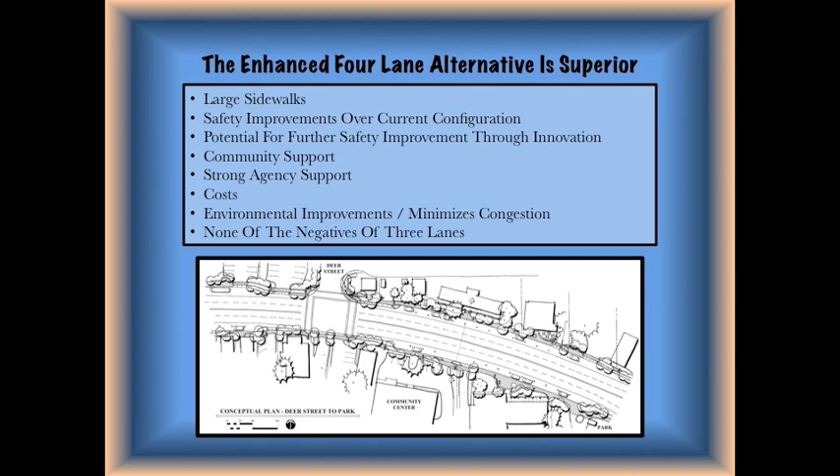The enhanced 4-lane option would be a great improvement over what currently exists, and has received strong citizen and agency support. The 4 lanes will not have a slew of issues that are associated with the implementation of the 3-lane road. In 1999, Caltrans conducted a public outreach that was attended by 44 people. At the end of this meeting, only 4 people supported the 3-lane option.

Yet strong political influences have continued to push for the 3 lanes for the previous 10 years, and despite evidence against such a plan, may yet see the highway's capacity severely reduced. This would be contrary to the community and visitor desires measured in several polls.

The North Lake Tahoe Resort Association conducted several polls that show the #1 issue both residents and visitors have with Lake Tahoe is traffic congestion. And yet, Placer County is trying to spend $50 million creating this congestion.

The Kings Beach Business and Citizens Alliance ran a series of 6 advertisements in the local papers. With each ad, there was an increase of support from local citizens and businesses for the 4-lane option.

Here is the cost estimate of the 2 projects from almost 2 years ago. The current price tag is $50 million.

So, let's talk about how great this 4-lane option is. One of the first things to point out is that the lanes are being reduced from 12 feet to 11 feet. The purpose of this is to narrow the vehicular lanes and slow traffic. This is a commonly used traffic calming technique and has shown great results in reducing vehicular speeds.

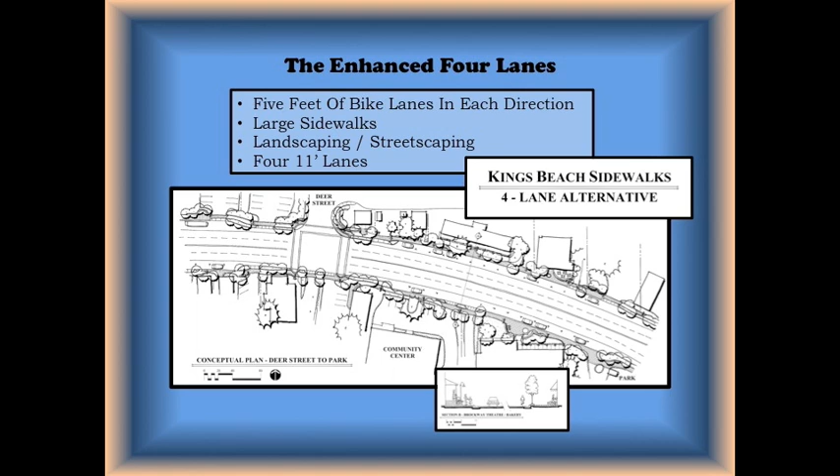An engineer was hired to analyze sidewalk widths within the commercial corridor and concluded that the average sidewalk width on the north side of the highway would be 8.9 feet and 7.8 feet on the south side after implementation of the enhanced 4-lane option. With the purchase of right-of-way easements, the sidewalks will ultimately be larger than this, though.

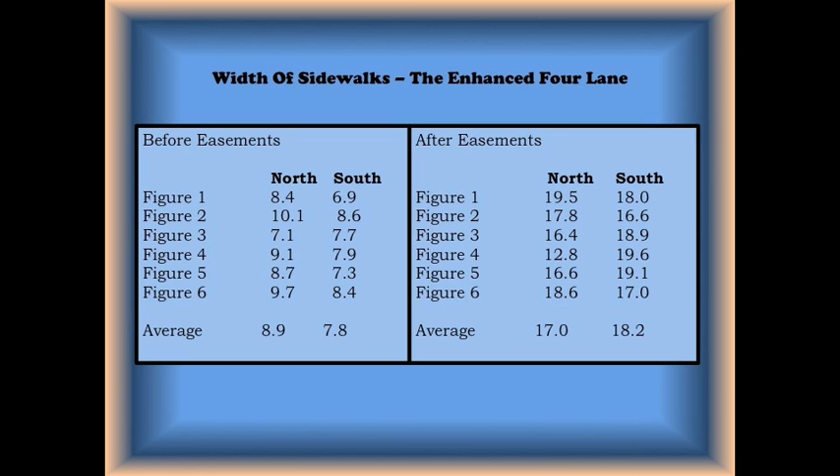Let me explain. Here is an example of a right-of-way easement. The line seen here marks the property line for the public right-of-way in Kings Beach. But throughout Kings Beach's commercial corridor, the sidewalk extends beyond this property line and onto private property. Placer County purchased right-of-way easements to encourage businesses and property owners to help create larger sidewalks than would otherwise be available.

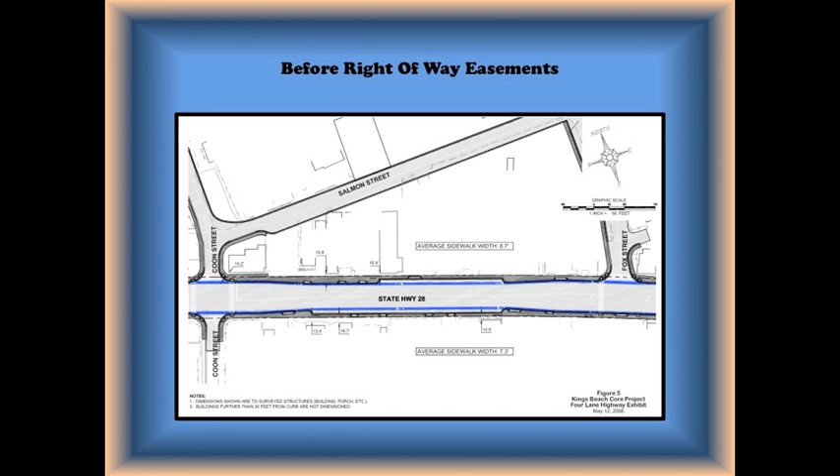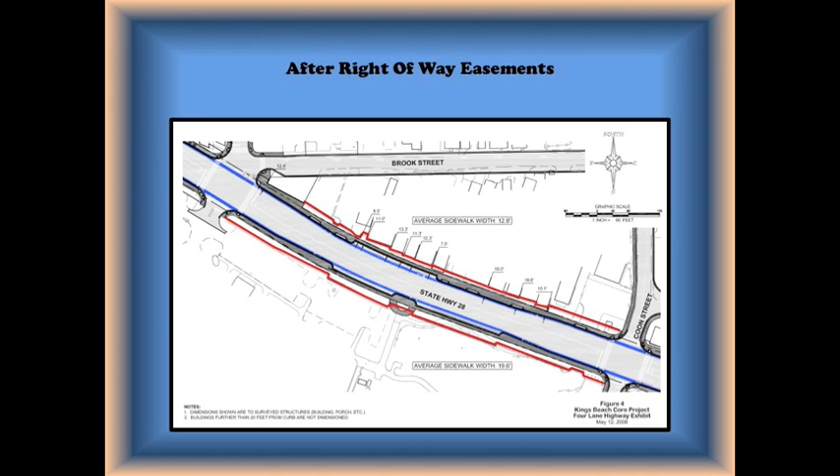Seen here is the engineering conducted to calculate sidewalk widths. Before right-of-way easements, the sidewalk on the north side has an average of 8.7 feet. After easements, the sidewalk could have an average of as much as 16.6 feet. This technique of review was used throughout the commercial corridor to calculate these numbers.

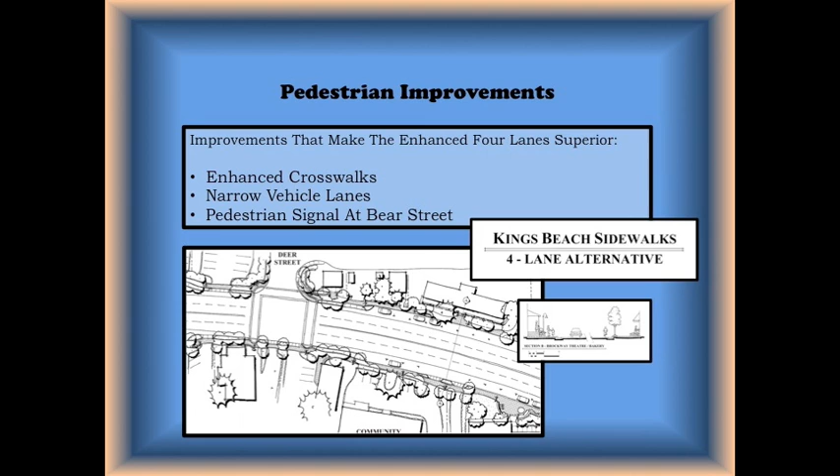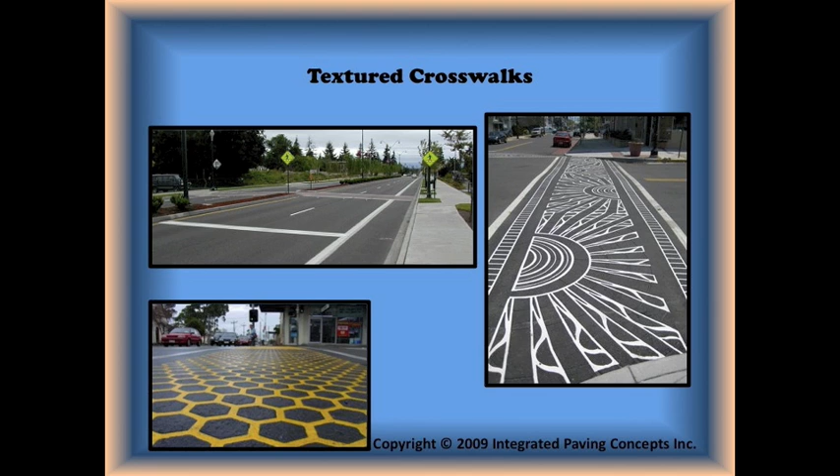The 4-lane road includes several pedestrian improvements in addition to large sidewalks, including enhanced crosswalks and pedestrian lights. Textured concrete is used to make crosswalks more visible. Drivers tend to drive slower in areas with highly visible crosswalks, as these crosswalks signify to the driver that they are in a pedestrian corridor. Here are a couple more examples.

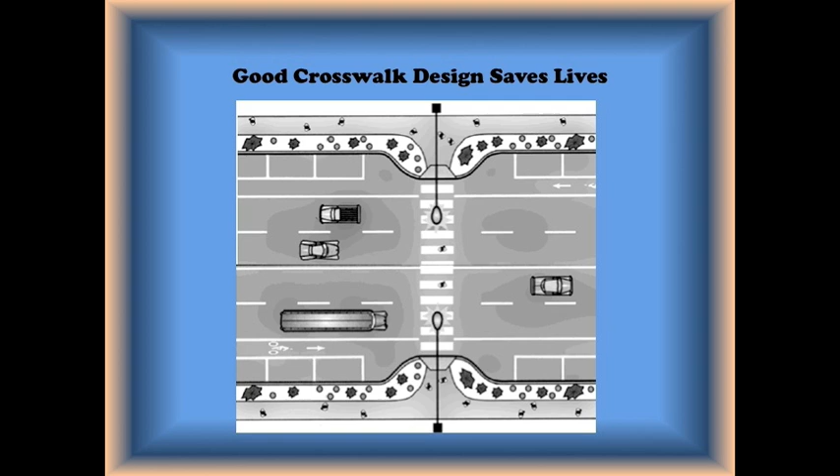Bulb outs are another excellent tool used to slow traffic and work well when they are located at crosswalks. The installation of a pedestrian crossing signal at Bear will help to facilitate the heavy crossing that occurs in the summer when pedestrians are using the State Park Beach and shopping in our downtown district.

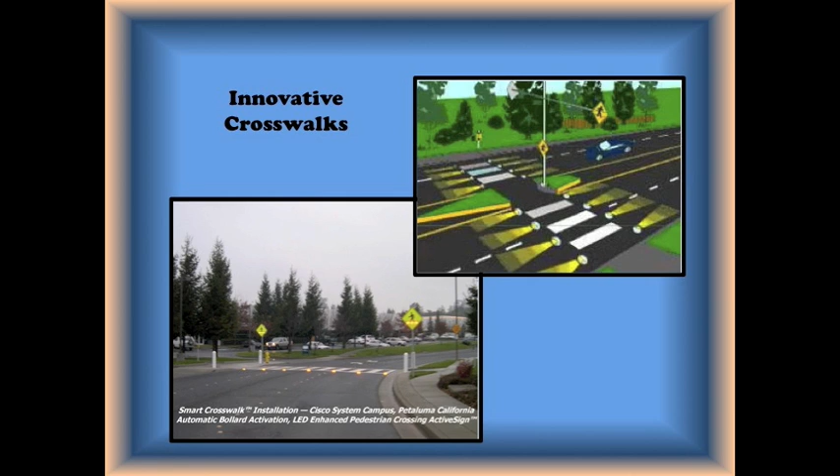Currently, we have poorly marked crosswalks. Proper signage is the first part in enhancing these crosswalks. Enhanced crosswalks can also and should include embedded lighting to make drivers more aware when pedestrians are in the crosswalk. These lights are used in snow country and work wonders for a roadway.

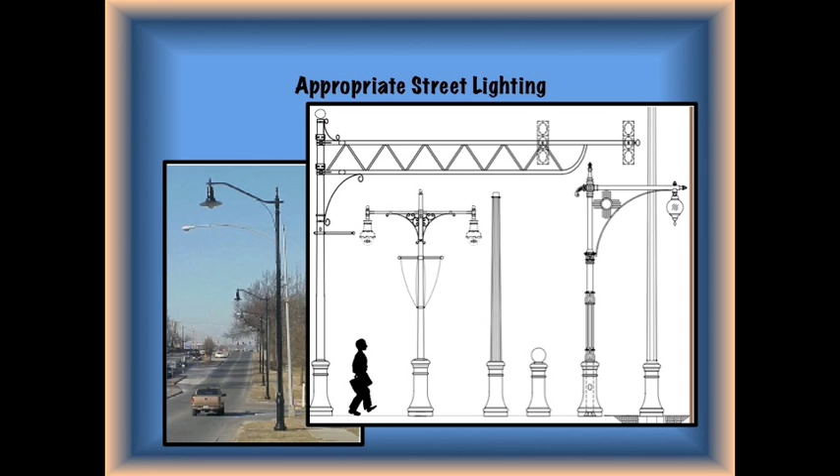Now, while there is a negative stigma around traffic signals, efforts have been made to make these signals more appropriate for beautified downtowns. Signals can and should be used that will match street lighting.

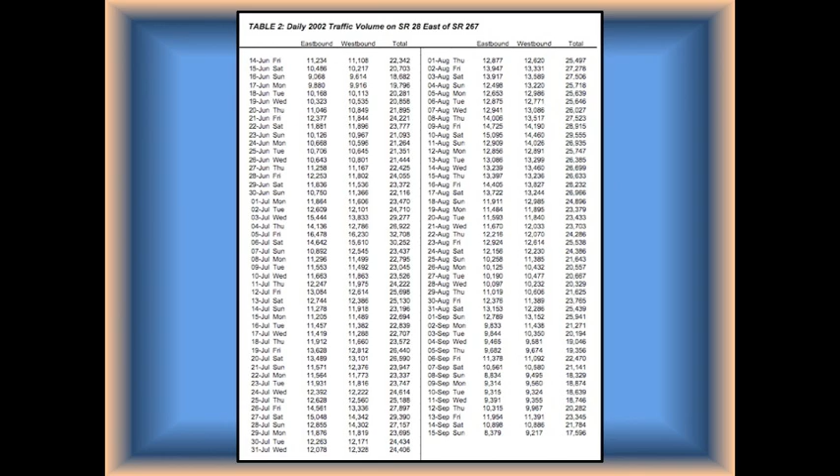While our average traffic counts in the summer are 24,000 vehicles per day, there are days when we exceed 30,000 vehicles in a day. This would lead to stop-and-go traffic within the roundabout. The signals are the best proposal for keeping traffic flowing at a decent rate in Kings Beach.

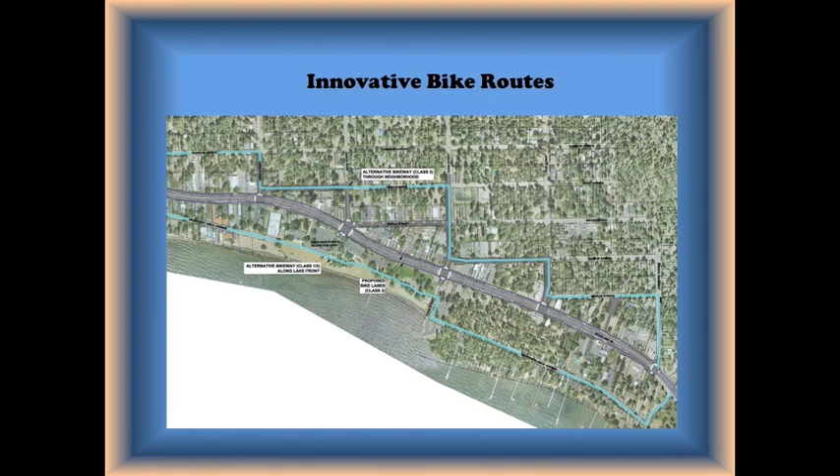While it has not yet been proposed, there is a desire to see the fiscal savings of the 4-lane road instead of the 2-lane road applied to innovative bike paths that would get casual and family bikers off the road altogether. While blue bike lanes may not be the best route for Kings Beach, there are innovative methods to make bike lanes more safe, and we should use some of these methods.